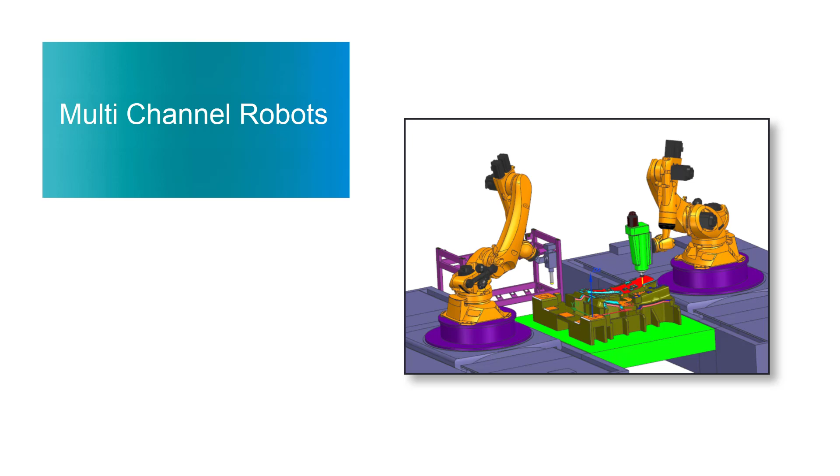This new feature supports multi-channel robot synchronization for Sinumerik controllers. In this example, we'll show how machine code simulation can execute channels simultaneously for two robots on rails. We'll also show how to add synchronization marks.

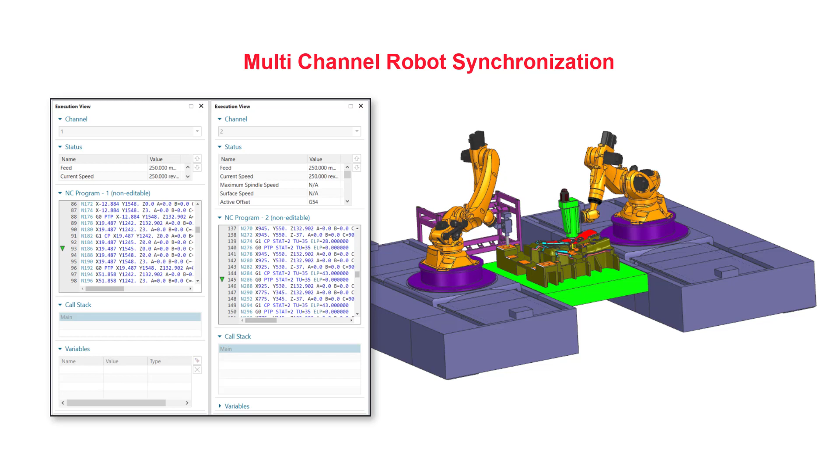The machine tool view of the operation navigator is where we pair the tool with the device and the device with the robot. Tools and devices have a customizable item to specify the target pocket. When there are two robots, we use this item to specify which tool or device goes with which robot.

You can now see the target pocket is set to As Mounted. This makes sense because the tool has already been mounted to the quill, so it doesn't need to be changed during simulation.

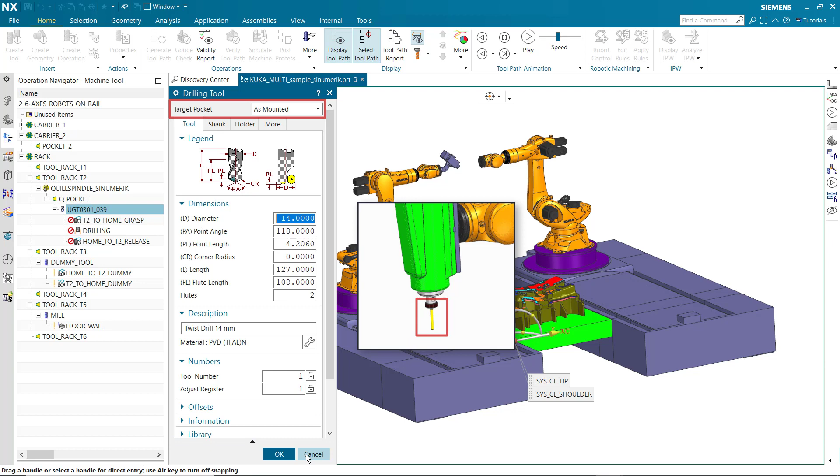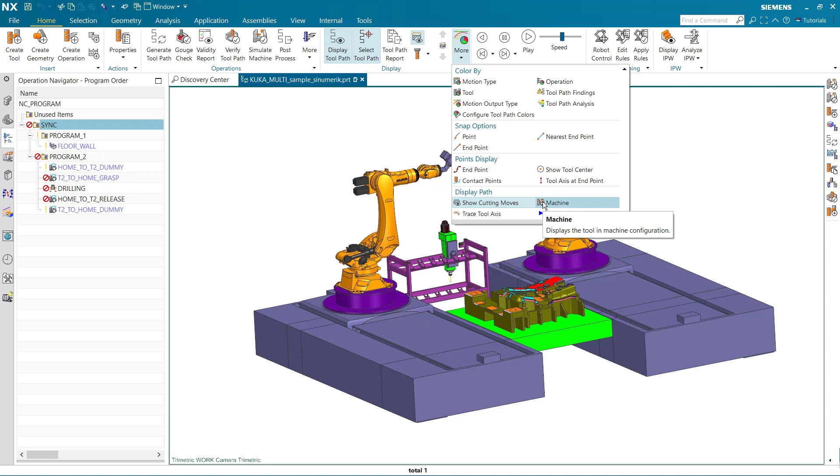Now let's look at the quill itself. You can see the quill will be mounted in Pocket 2, which is the flange on Robot 2. Note that the channel is assigned. One Sinumerik controller will run both robots. Sinumerik is a good choice of controller because it can handle 30 axes including two robots.

Simple play with a tool assembly will move the robot with the tool. First, Robot 1 moves, then Robot 2 moves. The robot display is not synchronized.

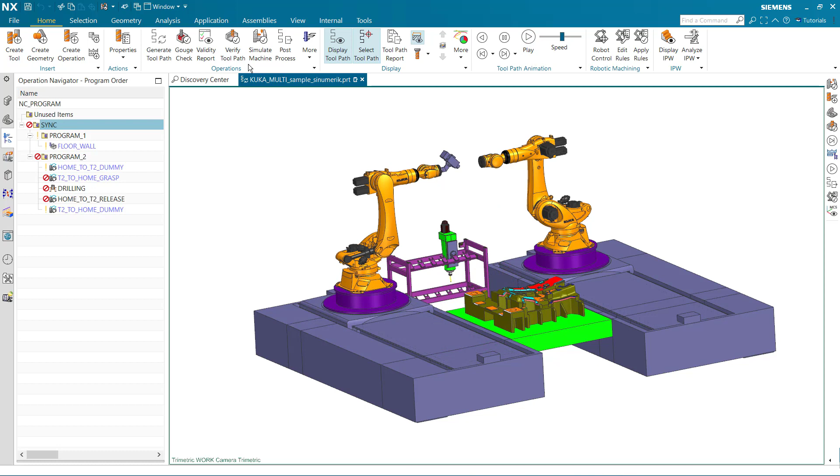Now let's look at toolpath-based simulation. Again, Robot 1 moves first, followed by Robot 2. The robot display is not synchronized.

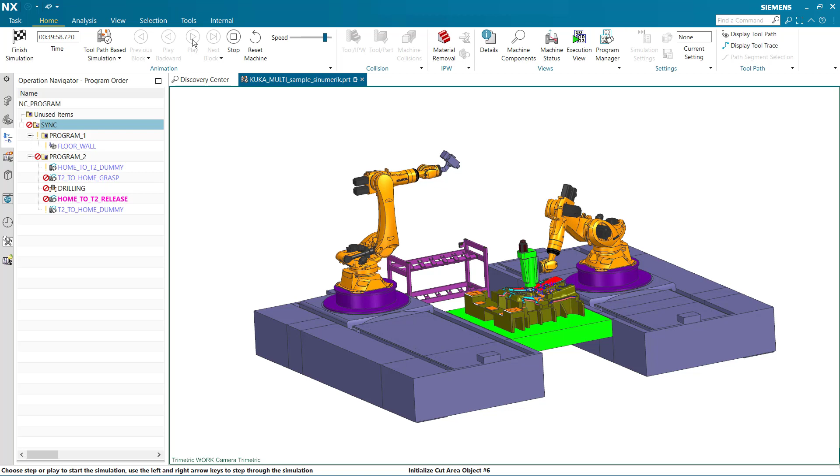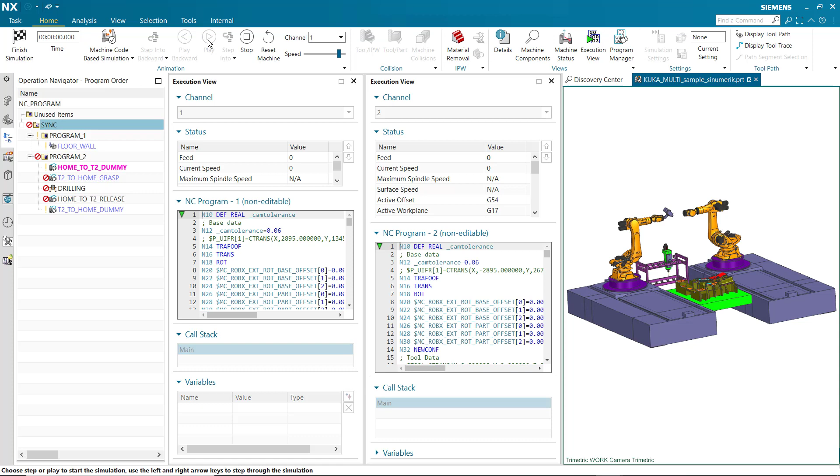For machine code-based simulation, both channels execute simultaneously. The system must run the entire post-processor up front before the simulation will begin. You can display an execution view for each robot. You can now see both robots play simultaneously and are synchronized.

Next, we'll add synchronization marks. NX must run the post-processor and machine code simulation for each robot up front so it can determine the relative times between them to attain a synchronized toolpath.

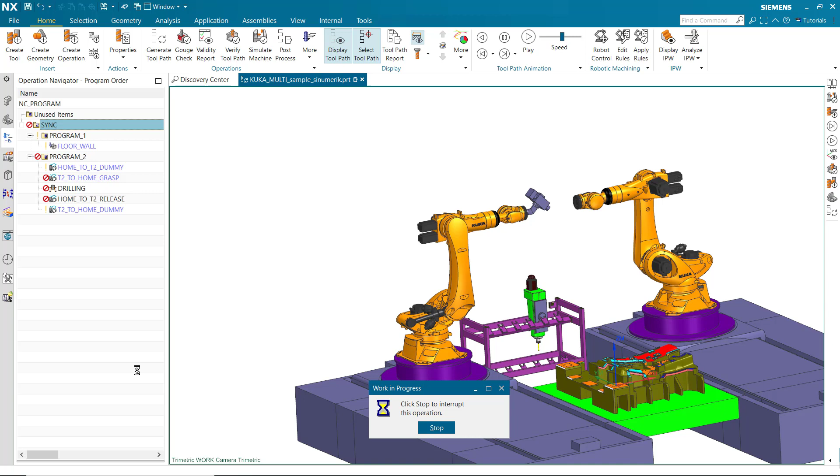What we see here is the same as what we saw for machine code simulation. Both robots play simultaneously but are not synchronized. We'll now add a synchronization mark so that the first robot will wait for the slower second robot. Both channels will be affected as shown by the checkboxes.

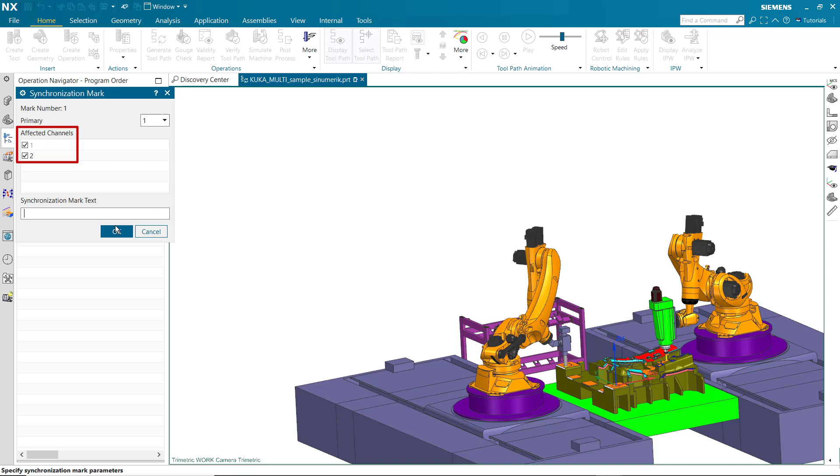Now we have a sync mark. Dragging the sync mark for the first channel to the beginning will cause the first robot to wait at that mark until the second robot gets to that point. We'll need to recalculate the times.

Again, NX must run the post-processor and machine code simulation for each robot. Notice that Robot 1 now waits for Robot 2. When the synchronization mark is hit by Robot 2, Robot 1 will continue.